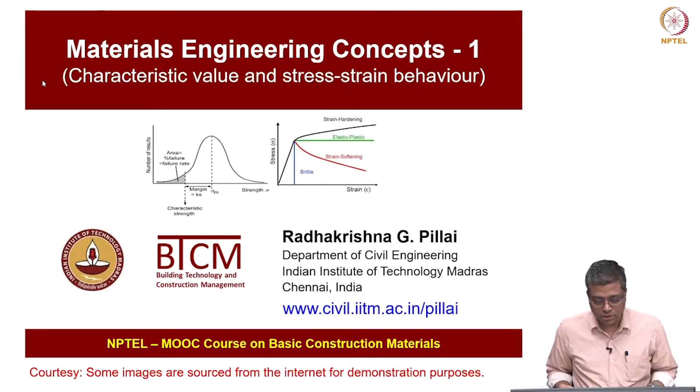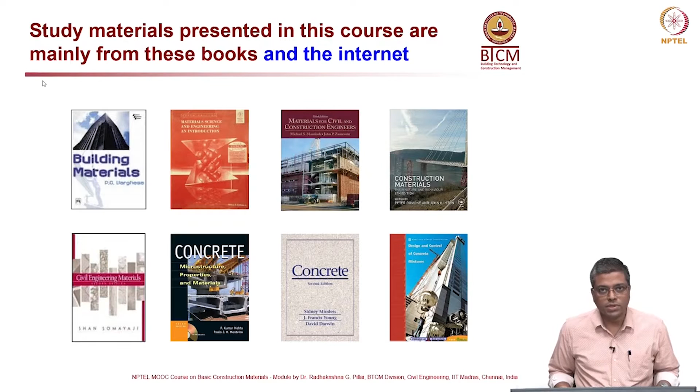Today is the first lecture, and these are the reference books which I use in this course module, and also we use a lot of information or photographs from the internet. The outline of this lecture will first cover variability in various material properties, and how to address this variability in the design process - that is where we use something called characteristic value. We will also discuss the stress strain behavior of various materials, covering elastic modulus, Poisson's ratio, yield strength, strain hardening, necking and failure.

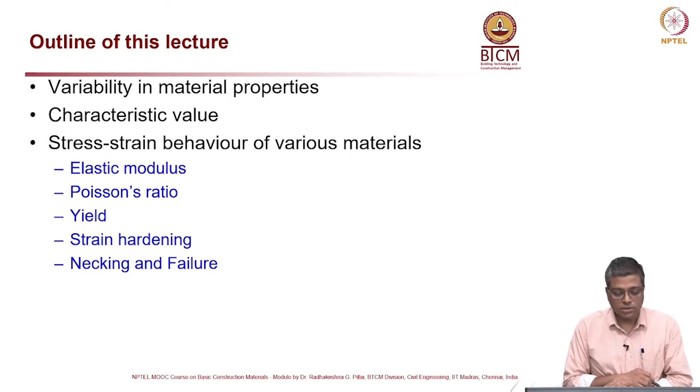So, variability and comparability of properties. I am going to cover just 2-3 material properties to tell you where we see the variability and what it is about. First, let us talk about density. What is density? It is mass of a material per unit volume, and it can vary significantly from material to material. From wood to metals, there could be an order of magnitude difference of about 2.

Another parameter is stiffness, which is the ability of any material to resist deformation, and it can vary. If you talk about from nylon to diamond, it can vary by 3 orders of magnitude.

Strength is another very important parameter which we look at while designing. Most of the time we give a lot of importance to the strength of the material, and it is nothing but the maximum stress that the material can resist without failure. From concrete to diamond, there could be a difference of about 4 orders of magnitude.

Toughness is another parameter, also known as work to fracture or fracture energy. What is it? It is the ability to plastically deform and absorb energy until failure occurs. If you look at glass, the toughness is very low, whereas a very ductile material can have very high toughness - in other words, ductile materials can absorb a lot of energy before they actually fracture or fail.

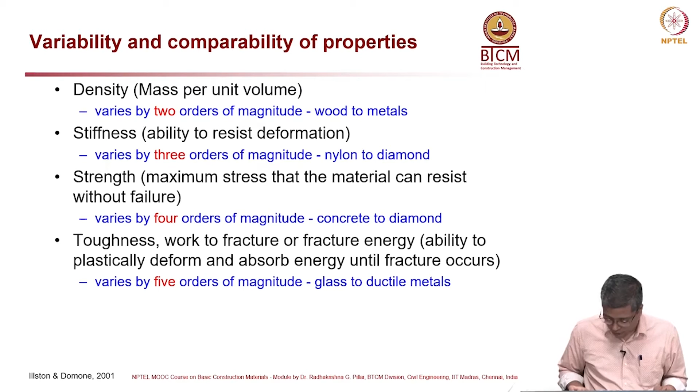Now, this is a table with the properties we just discussed. I do not want to go through the entire table - you can pause the video here and have a look at it for a few minutes, and then you can understand the variability of these different parameters across different materials and also within the same material.

For example, if you look at concrete, you can see that the density can vary from 1.8 to 2.5. If you are talking about stiffness of concrete, from 20 to 45 GPa. If you are talking about strength, again we keep on modifying concrete. So, we see a lot of variability in the same type of material by changing small things in the material design. In industry, when we practice, we see a lot of such variations in the properties of materials.

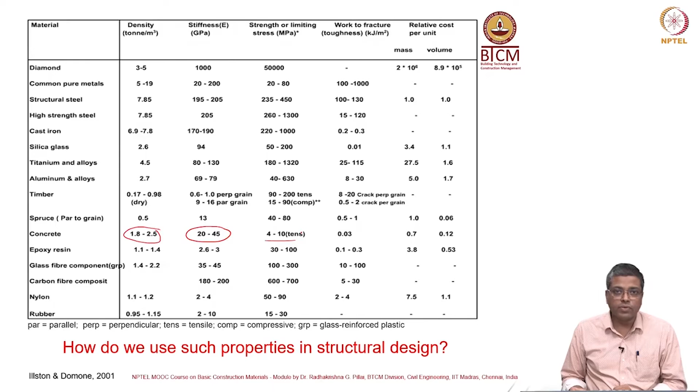Now, how do we use these properties in structural design? We have to take care of the variability also while designing, and at the same time we need to be safe. Before we talk about that safety, I would also tell you about different materials which are used for similar purposes.

For example, let us say you want to design a truss or a tension member in a truss - there you could use steel, you could use timber, many options are available. Here you can see steel in a truss member and also wood; both can take tension loads, tensile loads. So, what we are essentially trying to say is that for the same application we can use multiple materials.

Now, in such a case, how would you choose a material? For example, here you have a brick column and a concrete column, and both will have different strength.

So, based on the availability of the material, how costly each material is, and also we look technically at the weight of the material, the limiting dimensions, and the minimum useful life or durability. Cost is very important, and then you have to look at weight of the material and limiting dimensions.

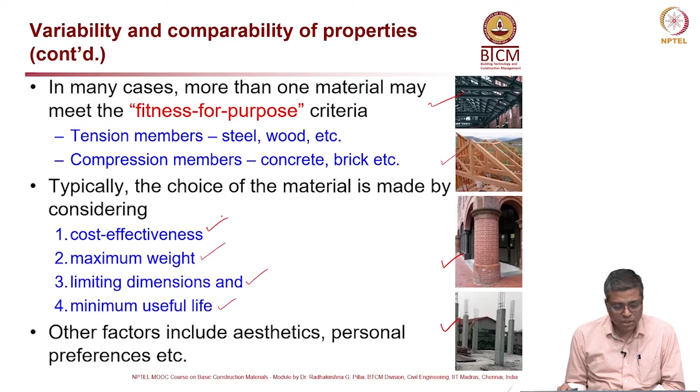If you are talking about a beam, if you use a wooden beam and replace that with a concrete beam, you can get more floor height. The clear distance from the floor to the bottom of the beam could be different in both cases. So it depends on various limiting dimensions which architects are always concerned about, since we want to create more space inside our buildings. Aesthetics and personal preferences are also important to consider.

Now we talked about the weight criterion. So how do we choose a material based on its weight? Let me show you an example. I am not going to go into detail about this slide, you can pause and understand these equations later. The example here is a cantilever beam, where you apply a force F at the end of the beam, the free end of the cantilever. The thick black curve is the cantilever beam.

You have an equation which tells you the deflection at the free end, u, expressed in the orange box: u equals the load times S cube divided by 3EI, where S is the length of the cantilever beam, E is the modulus of elasticity, and I is the moment of inertia, calculated by looking at the cross section. For a rectangular section, I is defined as BD cube by 12. Plugging this I into the first equation gives you this.

D is equal to 4FS cube by EBu, the whole to the power 1 by 3. From that we can get an expression for weight, involving rho, the density. You can simplify that into this expression for W, which is the weight.

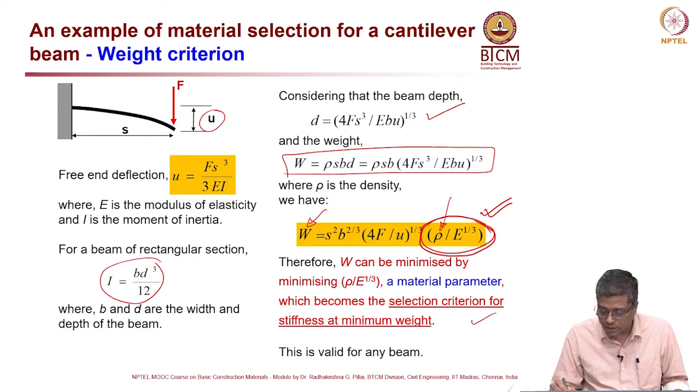This whole thing in the bracket is a product of the remaining terms, so if I can reduce the value of the term inside the bracket, I can reduce the weight. That's the idea: weight can be minimized by minimizing rho by cube root of E, which is a material parameter and becomes the selection criteria for stiffness at minimum weight.

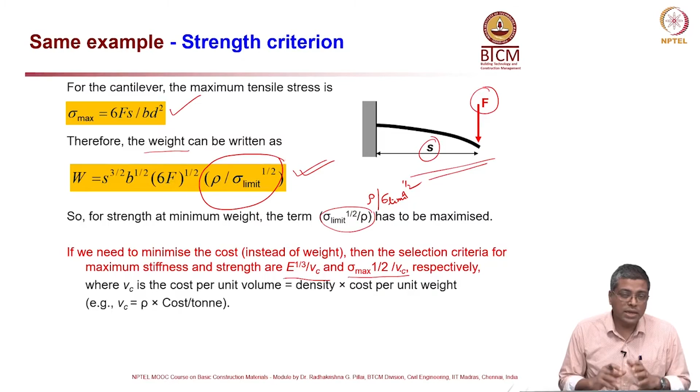Now, if we need to minimize the cost instead of weight, that is the third criterion. The selection criteria for maximum stiffness and strength are based on the stiffness criteria and the sigma max criteria respectively, where Vc is the cost. So you have to see whether you want to look at weight, strength, or cost as your main criteria, and accordingly come up with a formulation to minimize or maximize a particular parameter. This is generally adopted in various applications, because it is not only strength and weight you have to consider, money is also very important. That is why we also talked about cost. You have to think about various aspects and see which is the most feasible solution for you to adopt.

Now, this is a table you can look at here. For the same application, you can see diamond, and I can choose different materials, but the cost is going to be exorbitantly high in case of diamond. So, we may not go for it.

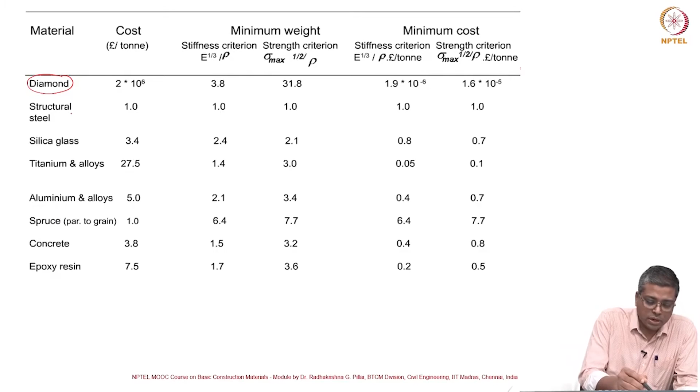But definitely people sometimes compare. Let us say for a building, if you are talking about column and beam sections, whether structural steel or concrete is the better option for you to go. So, there cost can play a role. For example, here if the cost of steel is 1, in case of concrete you can actually read it; that is the main reason why concrete is sometimes more popular than steel.

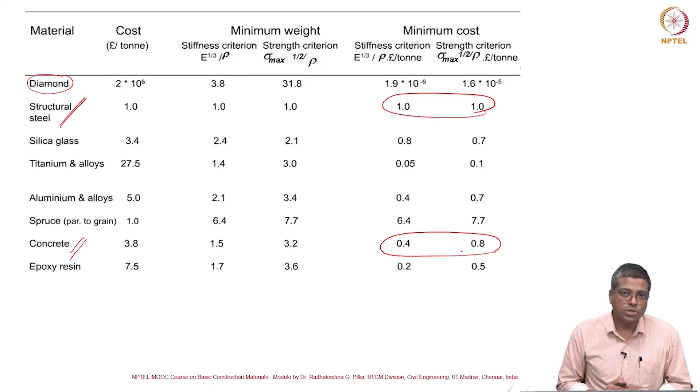So, different options are available; you have to have tables or information like this before you can choose what material to be used. When cost is neglected, diamond, titanium, aluminum, wood, epoxy are the best, but that is not the case in most applications. When cost has to be minimized, conventional materials such as wood, concrete, steel might be more beneficial.

And of course, you have to think of the time and location where you construct. For example, wood might be cheaper where a lot of timber is available, but not in places where it is not easily or abundantly available. Concrete and steel depend on where the manufacturing plants and cement plants are located, and various factors govern the cost of different materials. So, we have to think about cost while selecting materials in addition to the technical features.

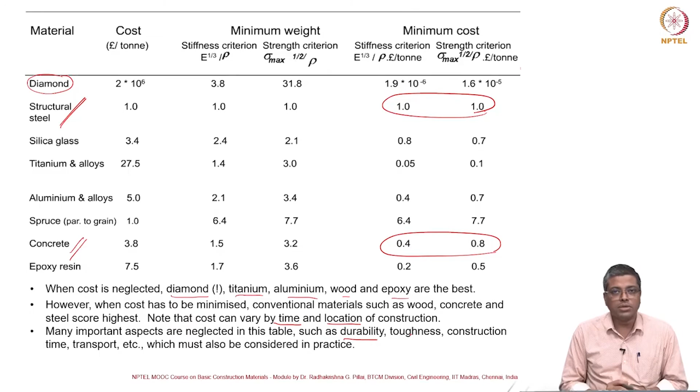This table is a very simple table. You also have to think about durability, toughness, construction time, transportation, and many other parameters before we really choose a particular material for construction.

Now, there are mean and variability in the material strength. For example, for steel here there is a term T, standing for tension, and C is for compression. If you look at steel with a mean strength of 460 megapascal, you can expect the coefficient of variation of the tensile strength of steel to be about 2%, whereas the coefficient of variation for compressive strength of concrete can be about 15%.

Why? Because steel is a more homogeneous material compared to concrete, and steel is manufactured with much better quality processes, whereas in concrete you use natural materials like aggregate. Cement is processed, but aggregates have a lot of variability in their properties, and the interface between cement and aggregate will also differ at different points within the concrete. That also depends on how the concrete was placed and compacted. So, we generally expect a wider variation in the properties of concrete compared to steel.

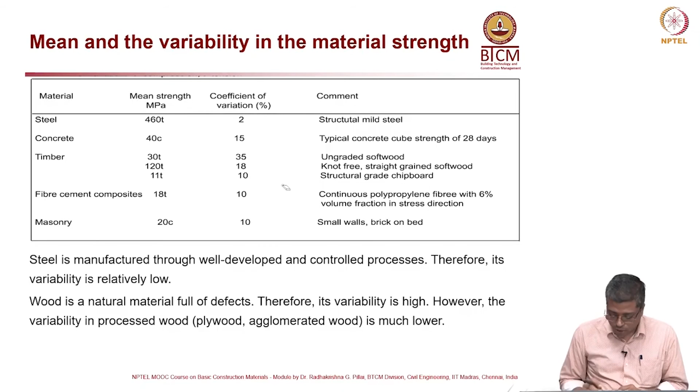So, you can see this variability across different materials, and that has to be considered in the design process. We cannot always use the mean value for design. If I use the mean value, 50% of the values are going to be above the design value and 50% below, so there is a very high chance of failure of the structure. So, what do we use? We use something called characteristic value.

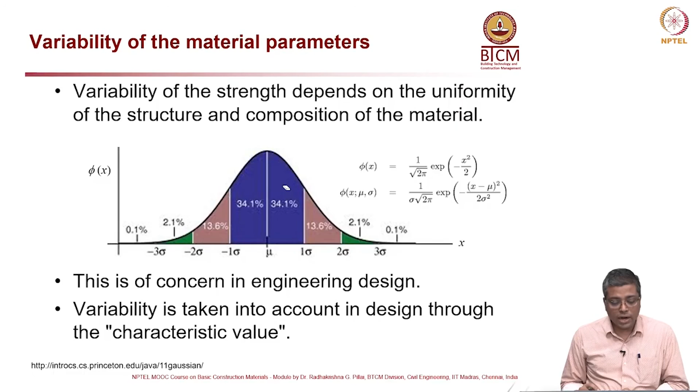Now, what is this characteristic value? The variability of the strength depends on the uniformity of the structure and composition, so a lot of variability is possible. We typically express this variability in terms of a normal distribution. In design and material selection, characteristic value is the value we can consider safe, corresponding to a value at which the probability of failure is at an acceptable level.

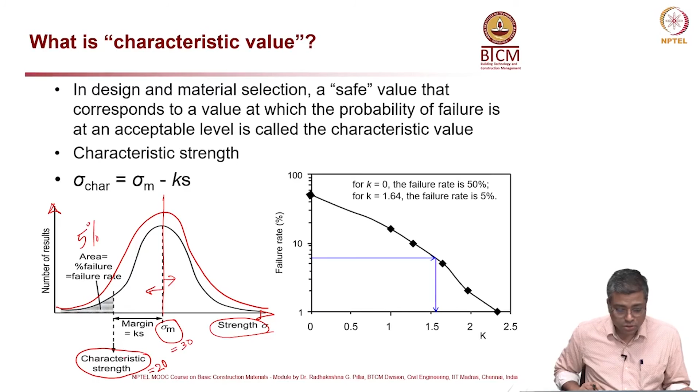If you are talking about a railway track, when a train goes through a particular point, every wheel will come in a very uniform way. The loading will be periodic but dynamic in nature. Every wheel passes here, then moves away from that point, so the load comes down, and again the following wheel comes, something like that.

Now, for random dynamic load, earthquake and wind loads are examples, and transient dynamic load means impulse or impact load. Let us say you have a heavy vehicle passing through a bridge. The moment the vehicle enters the bridge, that column might experience an impact load for just a fraction of a second, and then it dies down as the vehicle moves away from that particular column.

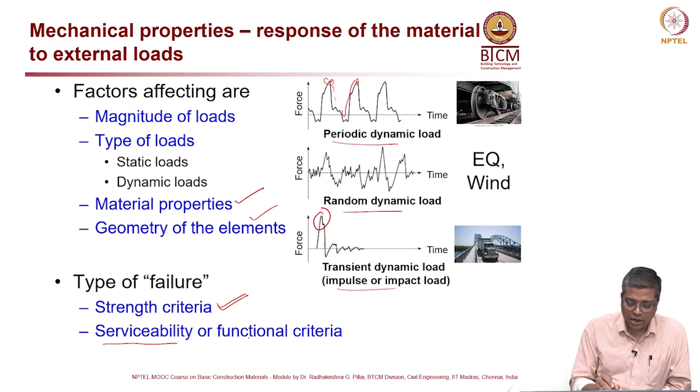Whereas serviceability may be something like deflection. For a bridge, I can say the deflection at mid span has to be within, let us say, 1 or 2 centimeters; some limit you will provide for the deflection. It is not that the bridge is going to fall or break into 2, but you want to limit that deflection so that it is comfortable to use that structure. So, that is one example of a serviceability or functional criteria.